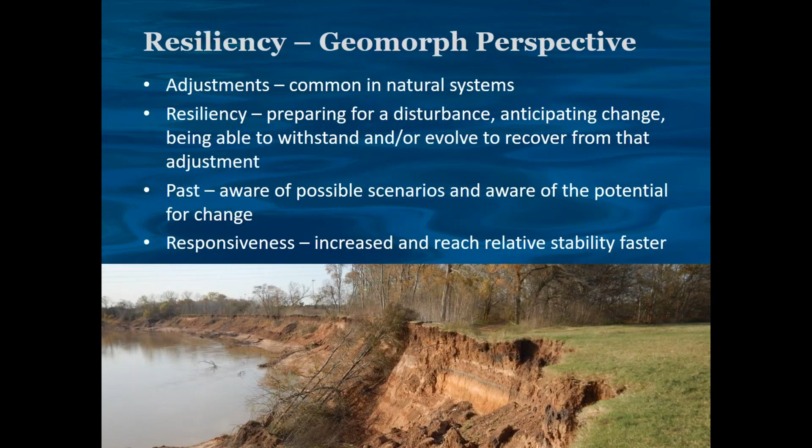So we're looking at rivers not just as a point on the map, we're looking at them as a system. They're alive, they're living, they're moving through the landscape. They're not just a small reach, they're big basins, they're watersheds, they're connected. So for those of you who don't know what fluvial geomorphology is, I'm going to give you a crash course, so just hold on to your seat. And for those of you who already know what it is, this will be a really general refresher.

So fluvial geomorphology: fluvial is relating to rivers, geo is relating to the earth, and morphology is the study of change. So we put it all together, and we're looking at how rivers change over the earth and how they're shaping and forming it. And this has been happening for millions of years. This isn't something that just came up. People have been studying this for a long time. But you think about how nature's been changing.

Like I said, I'm a geologist, so think of the Grand Canyon. Millions of years to form. The processes that are happening today happened a long time ago. They happened millions of years ago. They happened thousands of years ago. Paleo, historic, hundreds of years ago. Engineering, our engineering lifetime, 25, 30, 50 years.

And then even event-based. And the thing I like to note is that event-based circle, that is downstream of the Canyon Dam spillway. That happened after a rain event that lasted about 48 hours, 30 plus inches of rain, and it cut down many, many feet. And it happened very quickly. So it's really dynamic. Things are changing.

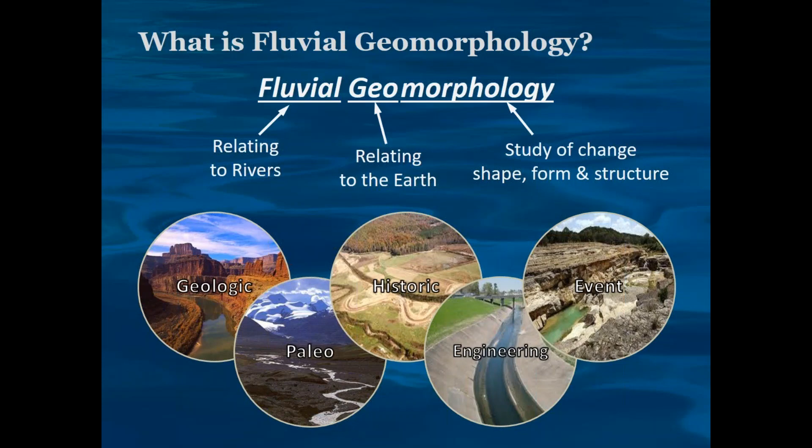So why do we study geomorphology? Why do we care? Well, because like I said, you need to expect change. It's natural. It's going to happen. And rivers respond to stressors, changes in our weather patterns, changes in the land use, where flow's going, sediment. All these different changes are changing how the channel is forming and shaping, and so does our infrastructure. As we build and encroach on our channels and our floodplains, that's changing.

So this is something I get really excited about. I'm a geologist, like I said. So geology and soils, that's the big thing that I'm looking at when I'm out in a stream. And the thing that I want to hit home on is you hear about geology and you hear about a layer. This is just an example from the Metroplex, the DFW area in Texas. And it's made up of all these different formations. And you have Eagle Ford and the Woodbine and the Grayson and what have you.

There's a long list. But the thing that we need to think about and remember is that each one of those formations is made up of many different layers, different lithology, different stratigraphy. It has clays and silts and sands and shales. And what makes it so interesting and exciting for me as a geologist and geomorphologist is that they all erode at different rates. So I can't just say, the Eagle Ford erodes at this rate. No, it just depends on where you are. Are you in the upper or in the lower? Just understanding your geology, your position.

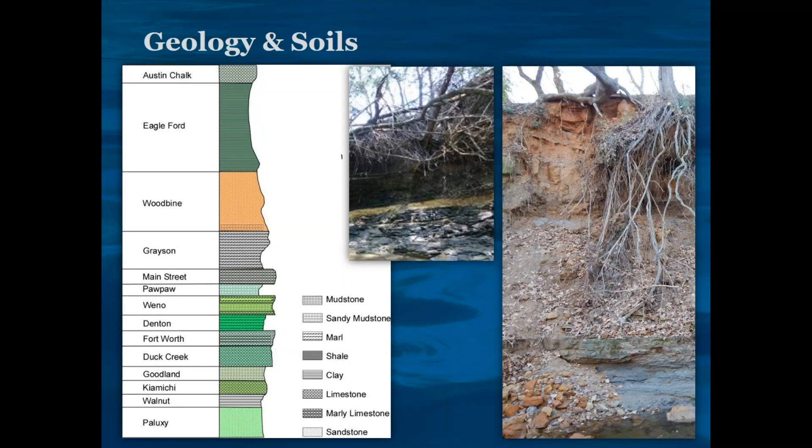And that really drives how the channel is going to form. Is it going to be threshold? Is it controlled by rock? Is it down cutting? Is it widening because it's in sand and sediments are more erodible? So it's really important. And geology, that helps form our soils. So I could spend all day talking about that.

Anyhow, the next thing we look at is landscape change. And this is also really exciting. As a geomorphologist, I love to look at the land and the shape of it and how water goes over it and look at the history of the time. How did it form? Because it's been forming, like I said, millions of years. But let's just dig into what we're interested in. Because most people, when we talk about geology, they don't care about millions of years. They care about the last 100 years.

So let's look at some photographs of the landscape. You have 1952, 1968, 2015. This is also in the Metroplex. This is around Grand Prairie, Texas. And the one thing I like to always talk about is what the heck are the rivers doing? I don't think they know what they're doing as much as we don't know what they're doing.

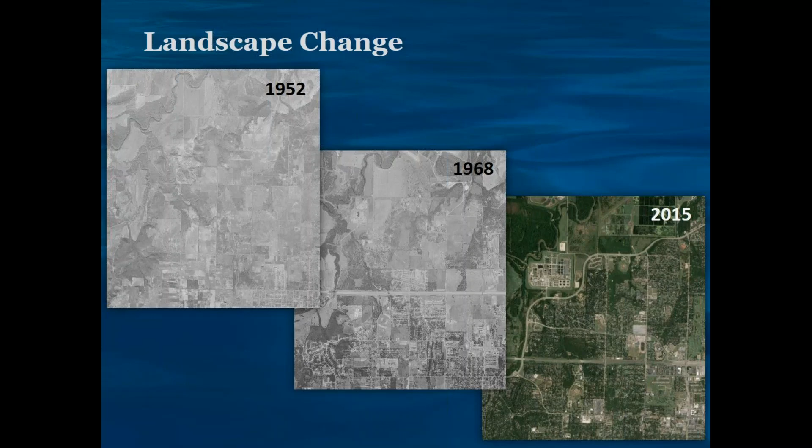The reason is we've been farming and manipulating the land for 100 years, even before this was urbanized, before it was developed. So we have been changing our channels and influencing them for a long time. So understanding how they change through time is very critical. Understanding how the flow is getting to them, what's changing, what's going to change.

The next thing I want to talk about is just meander migration. And the reason is a lot of people, when they think of rivers, they think of them moving side to side, just laterally. And which is true, they do. And some of them move more than others. Some move millimeters a year, some move feet, hundreds of feet. I mean, they're very dynamic. They move all over the landscape.

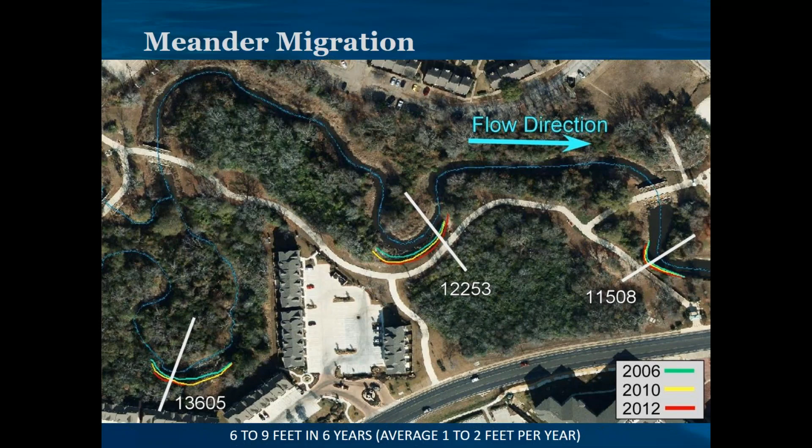And this is just an example from a quick desktop study of going, okay, what's this channel moving at? This is located around College Station, and it's in a very sandy material, and therefore it migrates pretty quickly, a couple feet a year. But the other thing you need to remember is that channels don't just go back and forth, they go up and down. So they're changing, vertically and horizontally.

Everything is happy and in balance. The water, the sediment, and the slope. Everything's happy. The balance is good. Then we think back to Lane's equation. And everything is working. We don't have any net aggradation or degradation. But then a stressor occurs in the watershed. Something happens, whether it be more water, less water, more sediment, change in slope. Something's happening that's causing an instability, and that causes channel degradation, downcutting.

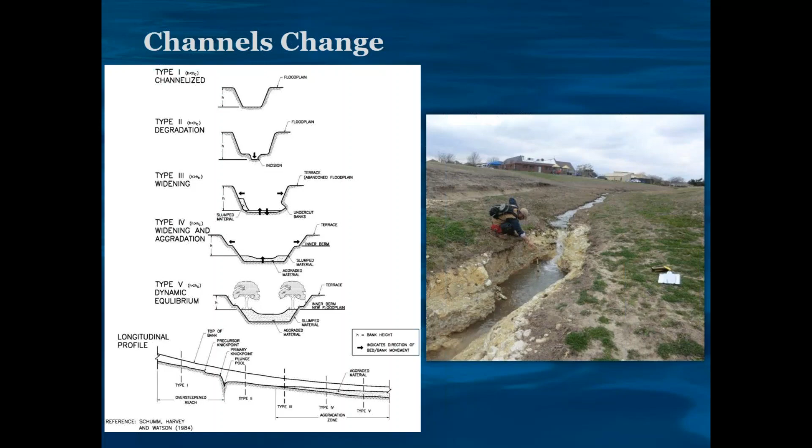And this, just to let you guys know, I live on a creek. I love streams. I live downstream of this. So I monitor this. I'm a big nerd, and I've been monitoring this for 9 years now. It's moved over 70 feet. It's pretty fascinating. And I want to go to the downstream part of it to show you. Same knickpoint. If you look downstream, it's just widening out. Everything is widening, and you can see a pipeline's been exposed.

But the other thing, we don't want to just talk about the channel and how the channel downcuts and widens and changes. It's also systemic. It's affecting the whole watershed. So as the main tributary, the main branch of your river, your stream is changing, so are all the little tributary branches. They're all changing. They're all downcutting. They're all widening.

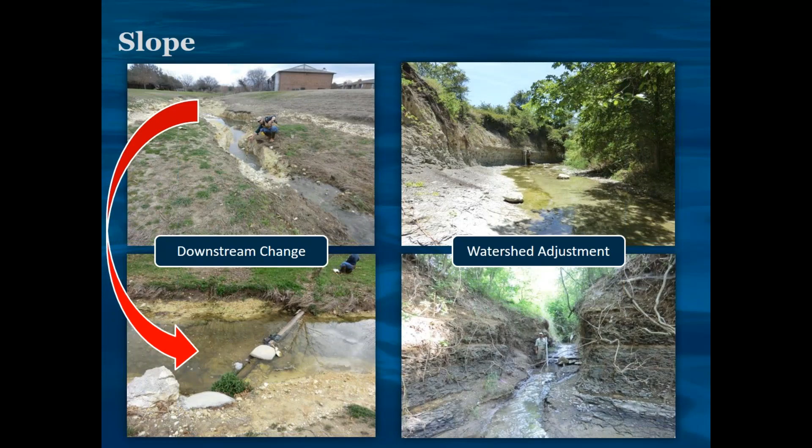So the next set of photographs, where it says watershed adjustment, you have a downstream, and you can see where it's basically in stage 3, it's starting to cut out that toe. And then you can see this is the one below it. That's a tributary that's just cut because it's trying to lower to the same base level as the major creek or the main stem. So you can't just think of it as a small reach. You can't think of it as a point on the map. We need to be thinking holistically, thinking more of that resilience, thinking bigger picture, thinking system.

So what does this mean to infrastructure? Because the title is Infrastructure, Rivers Collide. Here's a good example.

This is a 60-inch pipeline. The thing that I take away when I went to visit this site is, holy heck, if it hits the pipe and the pipe breaks, who cares about the dinky channel that's here? We're going to have a whole other big channel, because this is a major water line, 60-inch, 5 feet. And that's huge. It'll cause a whole new river. We'll have a much bigger problem on our hands. So this is why we care about looking at a system.

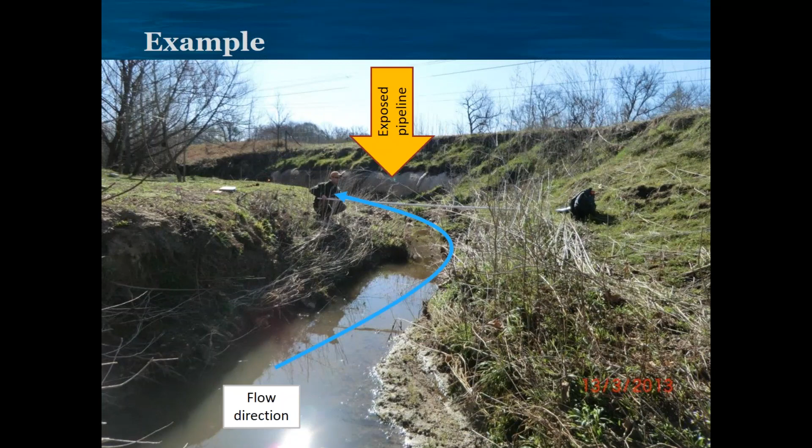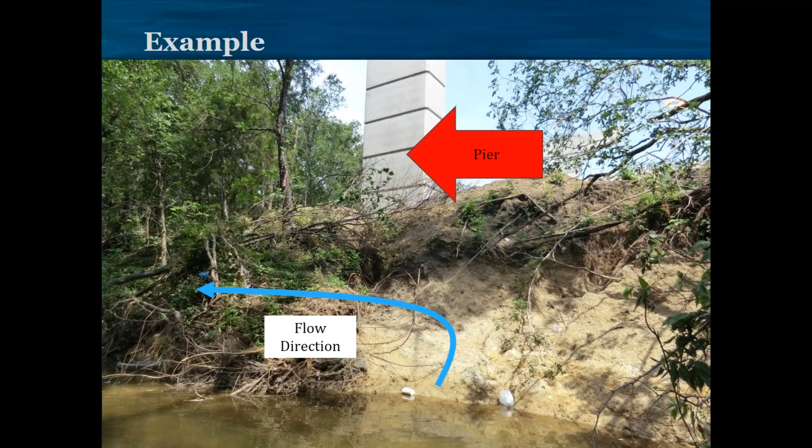Another example: this is a major interstate highway pier. This bank right here, with a water depth of about 25 feet, is cutting into that pier. So another big issue. Here's another example. This is a project that I've worked on before. It just has a lot of different issues, and this is common in an urban setting.

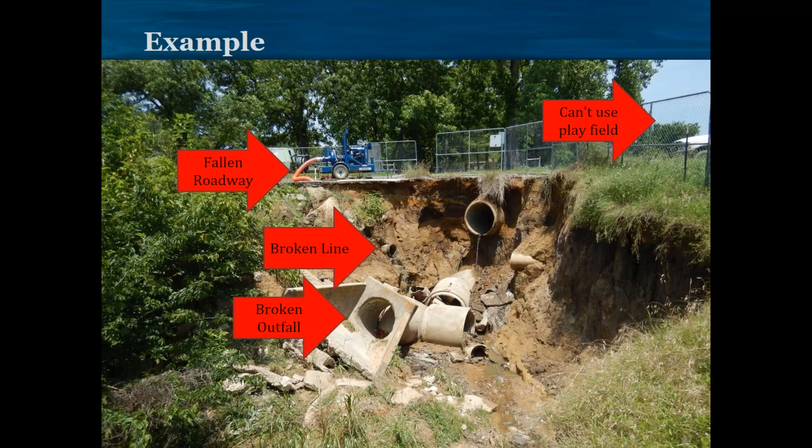You're going to see fallen, collapsed roadways, outfalls, there's a broken sewer line, and there's an amenity, a ballpark, that can't be accessed, all because of channel erosion, stream bank erosion. So figuring out how we can fix all this and make it more resilient so it doesn't happen again, or anticipate the change as channels change. They're dynamic.

And the last thing I just want to show you before I jump into a case study is how quickly these things happen. This is an example from a project that we looked at for a watershed study. We did a channel erosion reconnaissance where we basically just drove around this municipality, looked at where some of their issues were, ranked their channels, and this was a really interesting one. It ranked high, and you can see there's a lot of erosion. In 2011, it's close to a ball complex, a football field, stadium, and there's a lot of erosion going on.

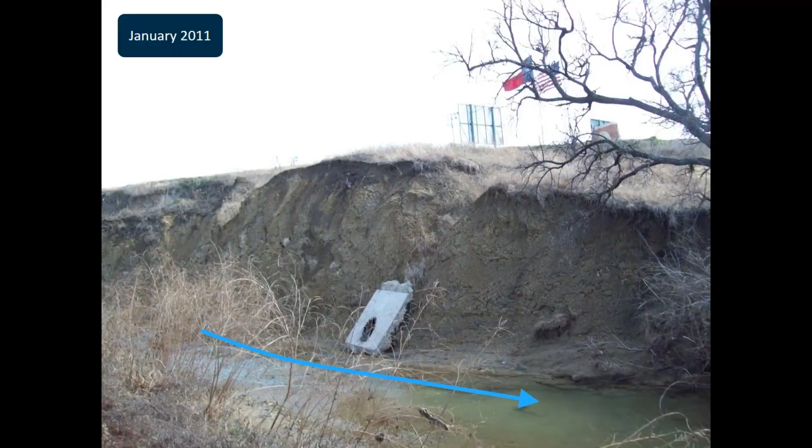And this is what it looked like in January 2011. And if you're from Texas, you know that after this, we went through a really big drought. We didn't get any rain. We got very few rainfall events. And this material, let's go back to geology, is composed of the Eagle Ford shale. This stuff flakes, it weathers really rapidly, it's susceptible to wetting and drying. As things dry out, it becomes more friable and just flakes off. That's what it looks like.

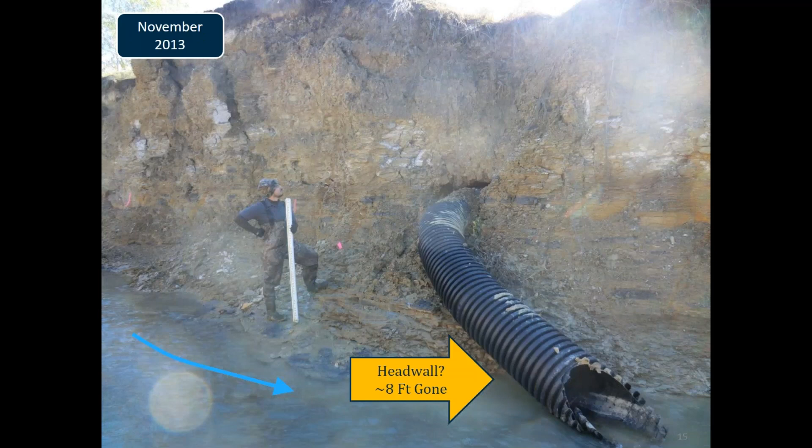And if it's remained wet, it usually flakes at a slower rate, because you're keeping it at a constant moisture. So the bottom is kind of kept wet, and it had a little bit of perennial flow. It's a perennial stream, so the flow was able to keep it wet. The next picture, this is November 2013. You can see that in just 3 years, we lost over 8 feet to erosion. That's a crazy amount of erosion.

The thing that I want to talk about is those two flow events caused that. There's a lot of material gone that's contributing to sediment loads in the watershed, but that's also encroaching on the infrastructure that's up on the top of the bank. You've lost the head wall, but notice the bed didn't really downcut, just the side. So this channel was laterally changing. So it's understanding how that is going to change, and then anticipating, if we protect that side, where it's going to change. It's probably going to change on the bed. So we incorporated some kind of protection on the bed as well as the banks.

So let's try a new approach. I'm all about a multidisciplinary team. We all need to be working together. We all have special skill sets, and to make these projects sustainable and more resilient, you've got to have everybody in there. We're all pieces of the pie, and so if you have biologists, geologists, engineers, hydrologists, everybody working together, it makes for a really good project. And you're more holistic, and you're prioritizing, and it's always good to integrate the stakeholders too.

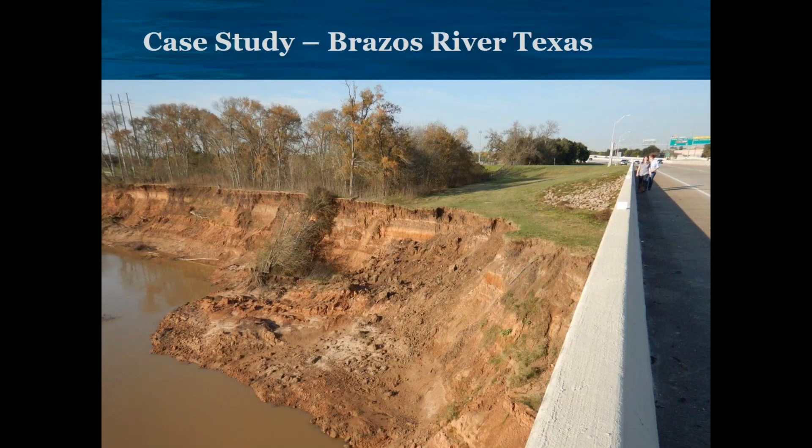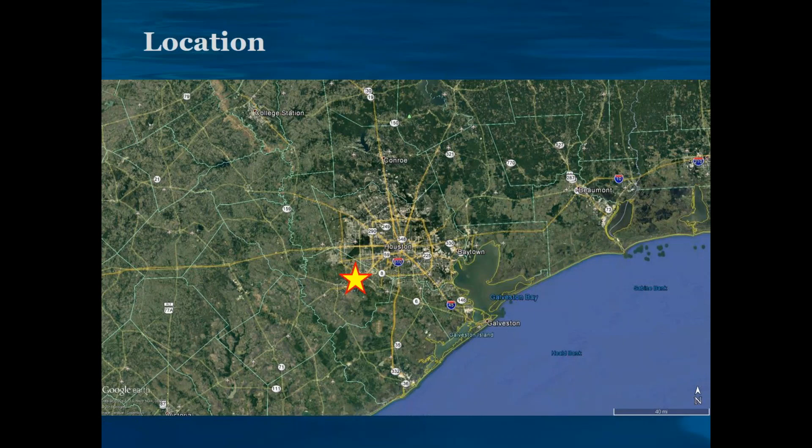So for those of you who want to know kind of where I'm talking about, here's the state of Texas. We're down near Houston. This is approximately where the site's located. We're looking at about 25 miles of channel during this study. So the star here is just zooming in. I wasn't going to bore everybody with the 25 miles of channel, even though it would be super exciting for

So channels are dynamic. The thing I want to talk about again, I live by a stream. I love it. Everybody does. Look at this. You can see people want to live near it. What we got to figure out is what's the balance? You know, what is the balance that we do?

Because, you know, things that make everyday life possible, from our roadways that get us to and from where we need to be going, from our pipelines that carry our water to us and away from us, and our parks that we have fun in, and our levees that keep us from flooding. All these things are in close proximity to our rivers and our streams, and it costs money to fix them. So how do we figure out the balance to work with them? And so you got to keep these in mind.

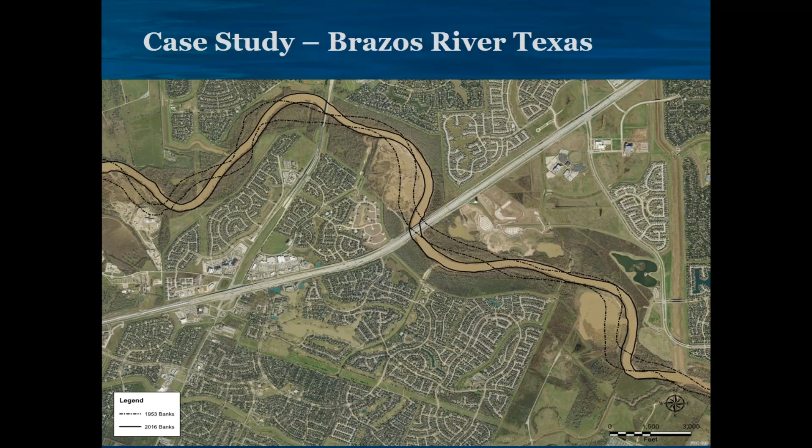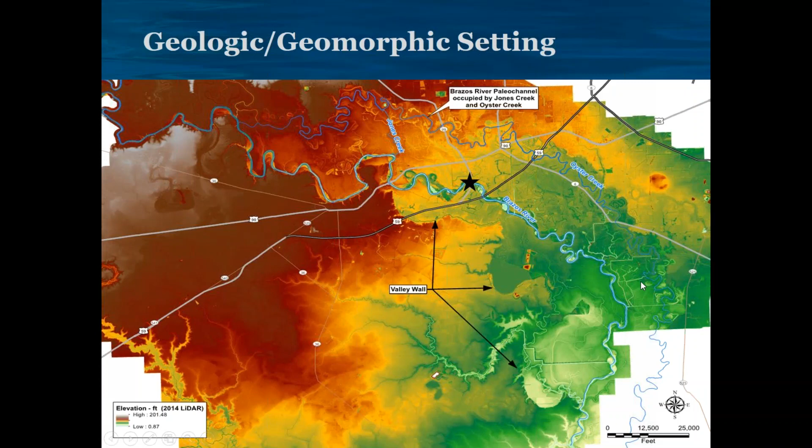The other thing is, right where the location that we're interested in is, it's basically going into coastal river processes. It's changing. And then as you get further down, you're going into more delta processes. So that's what we're looking at. You can't just look at the spot on the map.

So areas of interest, I just want to show some photographs of what this river looks like when you're down in the boat. I was really excited that I got to take a river ride with the team. It was a lot of fun, and got to see all the geology and all the erosion. And I know erosion's bad, but I really like it, so it's very exciting.

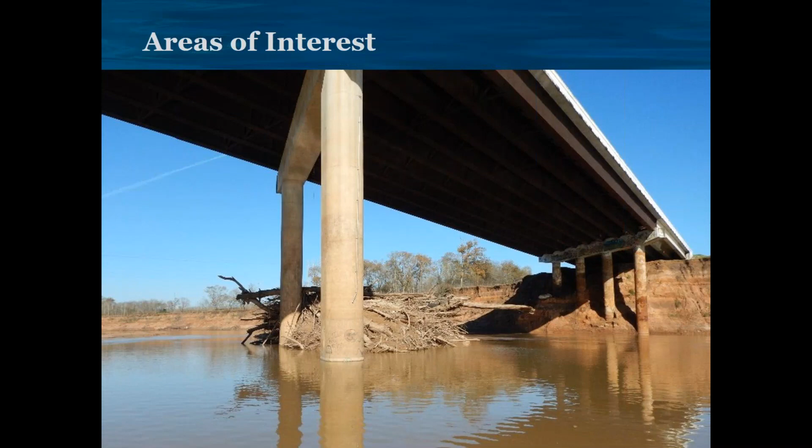This photograph shows one of the bridges that cross over the Brazos River, and you can see here, oh goodness, I want to go back. There is some tagging right here. The land used to be right here, and this used to be the whole bank slope, and now it's gone. It's all receded, eroded away. It's gone. It's over 120 feet. You can see that people used to access this. There's all kinds of tagging.

The other thing that's going on is there's homes built adjacent to it. There's all different types of erosional processes. These are normal. They're natural. Stream banks slump, they fail, they erode, that's what they do, they deposit, and this just shows one where some people are trying to fix some of the issues that they're having.

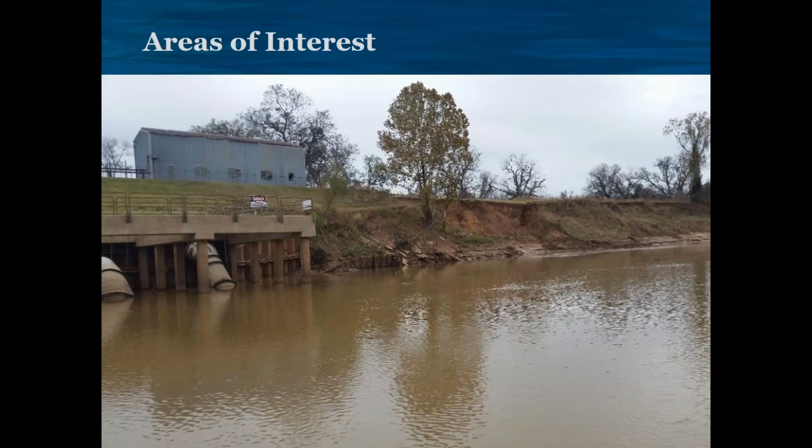There's pump stations that are located, pump stations that are taking water out, intakes, and how are these going to be affected? How are they changing the system? There's also sand and gravel mining operations. How are they changing the system?

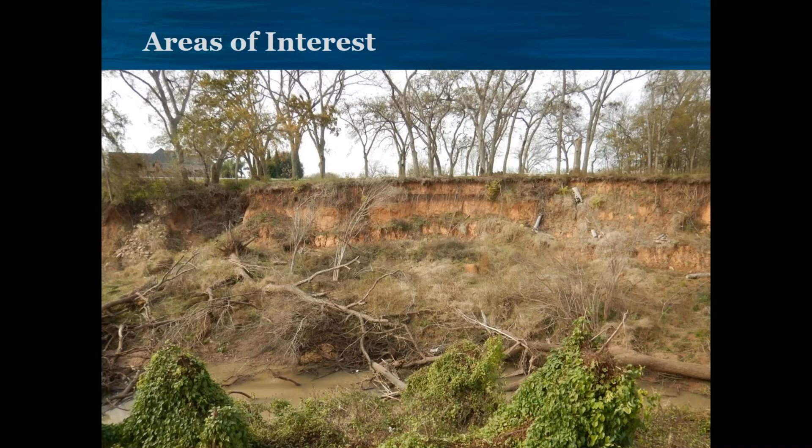The other thing is, I mentioned it earlier on the channel evolution, is that it's systemic, so through time, the channel's changing, the main stem's changing, so are all the tributaries. And this is a tributary of the Brazos. And you can see that it's slumping, and it's eroding, and it's going through the same processes because it's translating upstream, up the tributaries.

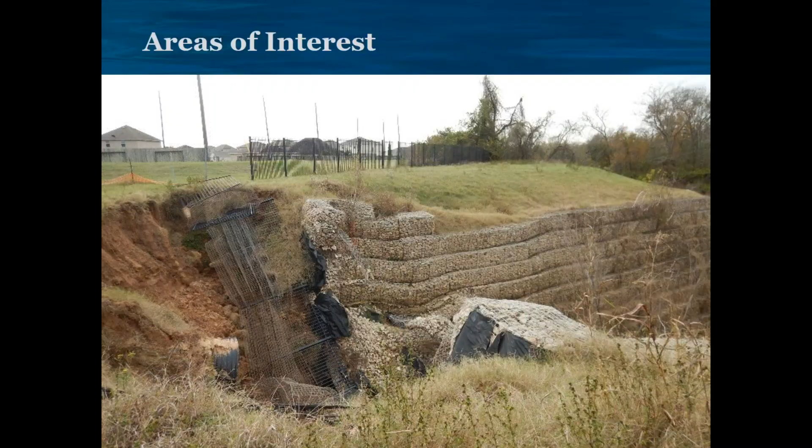And this is upstream of that same tributary. And you can see that it's been protected. There's a stormwater outfall there, and it's just going to keep eroding. I mean, that's what it's doing. It's changing in response. So it's a large system, and it's all playing off of each other.

So I don't want to spend a lot of time looking at all 25 miles, but I wanted to just show you that during these trips, when we go out as geomorphologists, what we're looking at is the erosion, the geology, and all the things that are really exciting to me that I thought was really cool.

And this one is when we floated it, we saw the Beaumont clay, and we saw Holocene, really recent sediments, 6,000 years old or less, a lot of deposition. And the really cool thing is you can tie the type of failure you see to the type of geology. So if we saw Beaumont clay, a lot of times we saw a lot of translation slides, the ones that move more horizontally. And wherever we saw more Holocene, more recent depositional, we saw a lot more slumps and rotation type failures.

And so this, if you weren't lucky enough to take a boat ride, kind of walks you through it, but you see where there's bar development, where there's sand moving through the system, where there's erosion, where there's benches, where there's terraces, where there's the rotation and translation type.

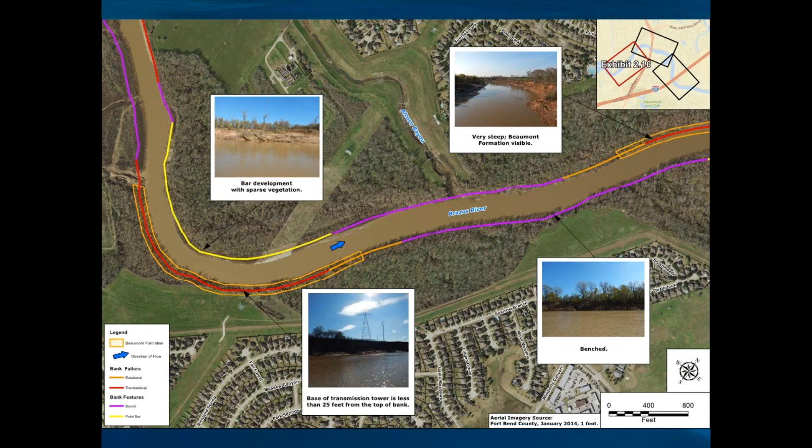And why that's so important is the geology can help us predict what type of failure we're going to see, because it can help us then with design. It can help us understand what the river's doing, where it's going. And so this just shows a couple different photographs of the erosion that's happening, the deposition that's happening, and other types of stability measures, protection measures that have been put on the channel.

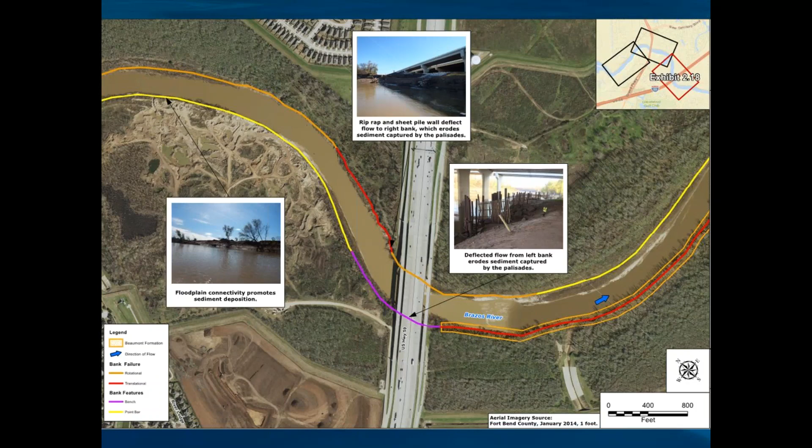So going into the analysis, after we've done all this field data collection, got to see it firsthand, looked at it, we also did a desktop analysis. We looked at aerial photographs from 1953, '77, '89, 2004, '10, and '16.

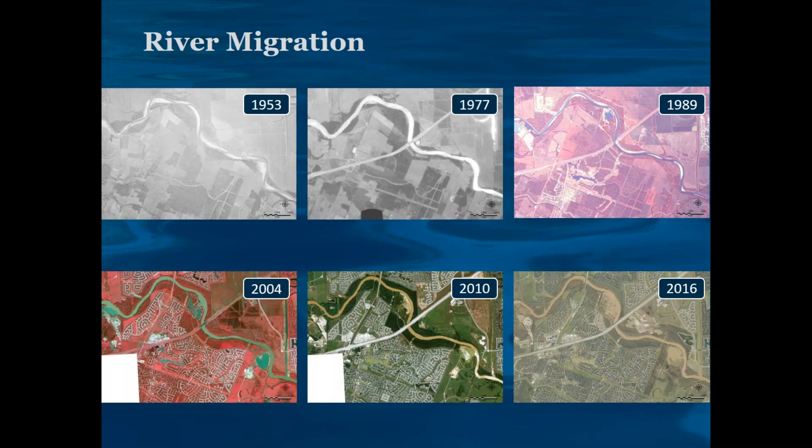The circles were positioned on the bend of the meander on that radius of curvature. And not to say they're exact, Bob and Susan may not have the exact ones, but it's probably a little bit closer. And once the circles were placed, then we placed the centroid in the middle. And what this shows us is how the meanders are changing through time. And to us, this is really cool, because we get to see how they're responding.

How are they rotating? They're alive. They're rotating. They're translating. They're moving. They're shrinking. They're growing. What are all the things that are changing them? Does infrastructure affect them? Do bridge crossings affect the growth? Does vegetation? What's keeping them from growing? Are they translating downstream? Are they rotating downstream? Are they all shrinking, getting bigger? Are they going to cut themselves off? Those are the things that we're looking at.

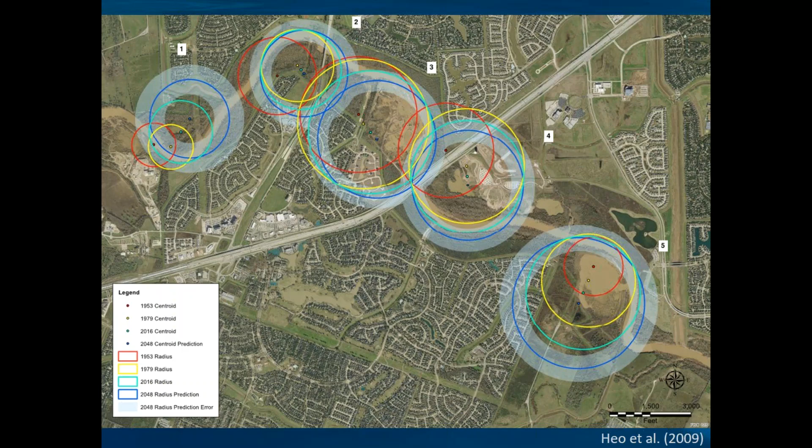And there's a big prediction error that goes with that. And so that light blue buffer that you see means it could be plus or minus this. But that's just to show it's science. So we're just understanding, what is it going to do?

Well, we took that data, and this is where the artistic side comes in, I feel like a lot of geologists are artistic, and you're having to interpret your science, your data, and say, well, if we use those circles and those meanders and the current alignment and the widths and depths, and we didn't see that the width of the river changed much in the amount of time we had. So if we assume everything kind of stays constant, maybe this would be the future alignment in 2048. But it gives us something to go by, something to use and predict what's going to happen on the river.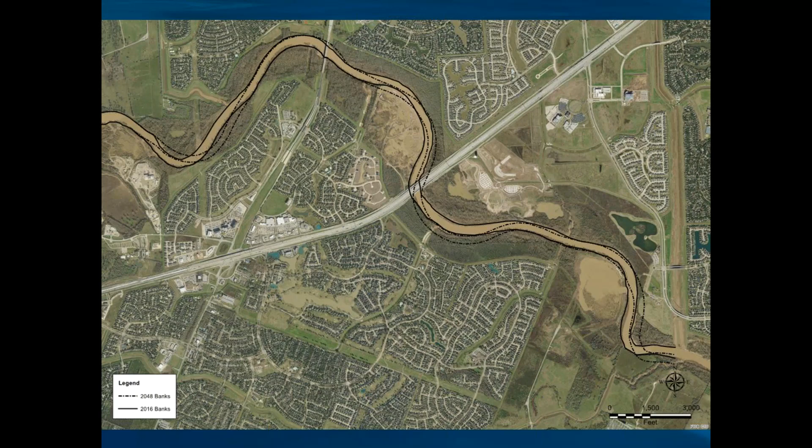So this is where that more resilient approach comes in, looking at the system, looking at how it is going to change over time, so we can anticipate and we can be forward thinking. So this is where the multidiscipline approach comes in.

The next thing we did was we used bathymetry, and here's just an example of the bathymetric data. This is water depth in feet below the water surface, and this was converted into elevation. And this was really neat. We did a long stretch of channel on the river. And the really cool thing is, through talking with landowners and through the bathymetry, at this one bridge location, there was a large scour hole.

And talking to some landowners, they said that scour hole had been there for a long time, and it wasn't a result of the bridge. Which is nice, because a lot of the other meander bends also had these same scour holes, almost at the same depth. So it was really neat. Now, we all know, as geomorphologists, meanders have scour holes. They have large pools on them, and they're deep.

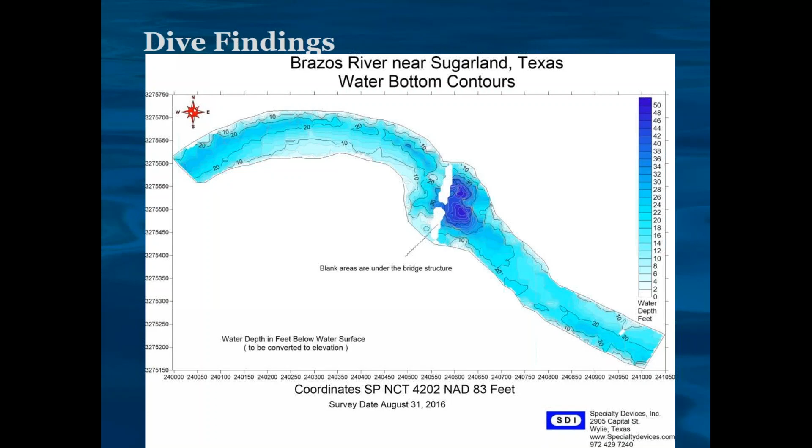Obviously, infrastructure causes more localized disturbance and additional scour. So we're seeing that. But it was really neat to get this data, and then this data was then incorporated into the HEC-RAS 2D modeling.

And then what happened from there is, so we used the revised bathymetry, and I have two figures here. The one that's on the left, that's the pre-existing, that's with as is using FEMA, and that's without the bathymetry data. That's not seeing any of the channel changes down below the water surface. And you can see pre-existing and existing, and you can see the amount of change. And so revising this bathymetry, you can see new conditions.

And the cool thing about the 2D is you can see these hydraulic changes in the density and the flow vectors and different stressors. And you can see that when you look at using the bathymetry data, you can see how the flow vectors have changed. You have more eddies, you have more variability, and that's understanding really what is that river doing, where is it doing it, where is it moving sediment, where is it moving flow, where is the erosive condition, where is the stress going up. So it's a really neat tool. Having bathymetry is so useful.

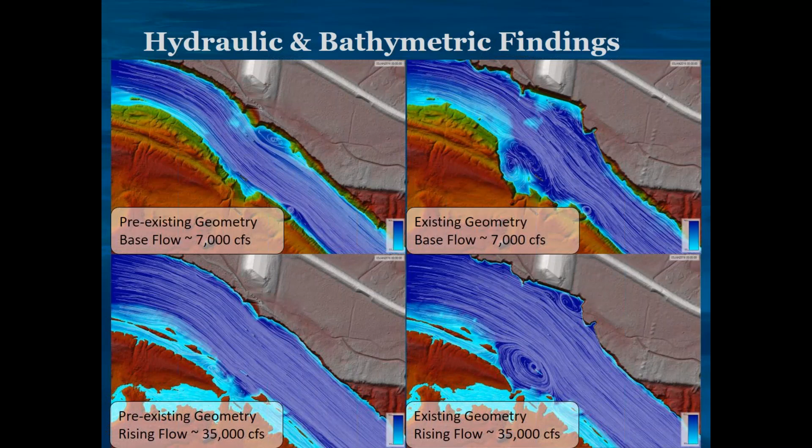I think it's great. Then the next one is just showing it at a higher flow, that's still within the banks, and you can just see the amount of change in those flow vectors. So it's just another important tool. And why it's so important from a multidiscipline approach is when you start integrating all these things, we start integrating the morphology of that channel and how it's changing, integrating it in with the 2D modeling. You get to really see how is that river functioning, how is it alive.

The next thing is we did some geotechnical. We had some geotechnical findings, put some borings out, and we have a lot of cross sections. The ones that I'm going to talk about are highlighted in red. We have B6 and B7, because those are the worst case scenarios. They have the steepest slopes, and I'll show a photograph in the vicinity of B5, which is just upstream of B6. And then B3 and B12, because those were the midpoints between the end of our study reach. So we didn't want to go to the extreme end. We want to go somewhere in the middle and get a nice average.

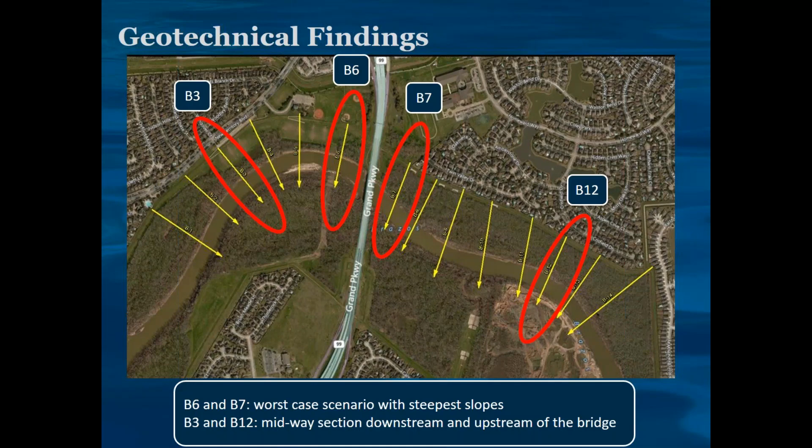So this is an example. This is the field team out when we did the boat trip. And it's a really steep bank, and that's me up there. I'm exactly 5 feet, so I feel like I'm a pretty good scale. And that's a really steep bank. It's like a belly crawl up there, and the person taking the photograph is on the boat. So you can just see the amount of bank material, and you can see the geology and how it's failing, and it's really neat. That just gives you an idea of what we're dealing with.

The really cool thing as a geologist, when we get to work on these types of projects where we have borings, so you get to see the boring and you get to see the profile, is really cool because you get to see the geology of what it looks like coming out of a little tiny hole versus what it looks like on the bank, and you get to line them up.

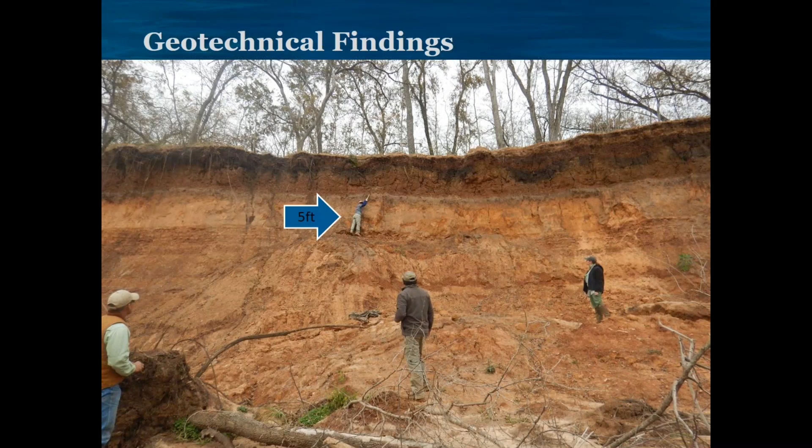So it's really neat. So as far as geotechnical findings, we did some slope stability, 4 cross sections, and we did multiple loading conditions. And the reason we did multiple loading conditions was to understand the slopes under different water conditions. Because the steady state, that's looking at rivers during constant level. How is seepage affecting the slope? The transient seepage, that's looking at bigger, high magnitude flood events. For this area, we used the Tax Day flood. So if you're from Texas, you probably know what that means. But it was a very large flooding event.

And then rapid drawdown. That's critical, especially if you have clay layers. That's because water rises so fast and it drops down really quickly. It doesn't give the clay enough time to drain, which leaves it more susceptible to failure. And then we also looked at deep and shallow failures, and that's basically looking at the geometry and how the failure develops, and then tension cracks.

If you see tension cracks, that's a good indication that there's going to be failure. We're looking at how deep they are and then where that failure plane is going to occur. And so taking all that data together, you start to develop concepts. And these are extremely draft concepts, but it's just looking at what could you put in the river?

What could be placed in there? Are you looking at more of a wall? What's that going to do? Are you looking at something that's using bendway weirs or groins? And what's that going to do? And by having that model data and that geomorphology data, you can put all those together and start looking at how the channel is going to change with time.

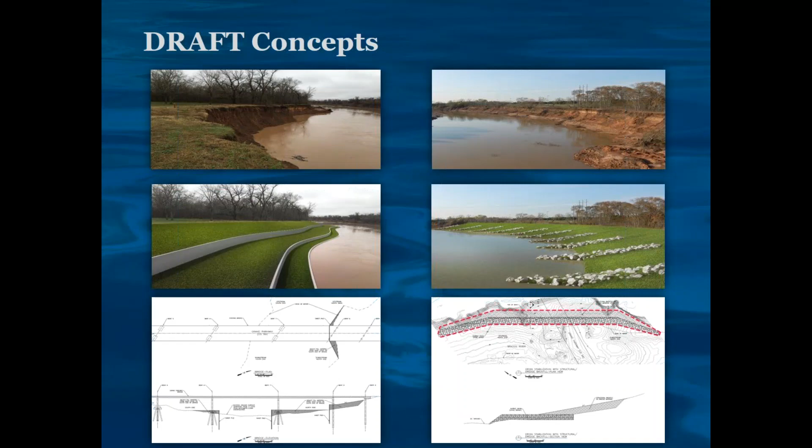And then the last thing, I got through that pretty quickly, that I want to leave everybody with is that channels, rivers, they're systems. They're big and they're alive, and like I mentioned, the things that make everyday life possible are in close proximity to them, and they all play a part and a role in how channels change and how they're affected. So keep in mind that when you're doing these types of projects, that one thing affects the other. You have to have a balance.